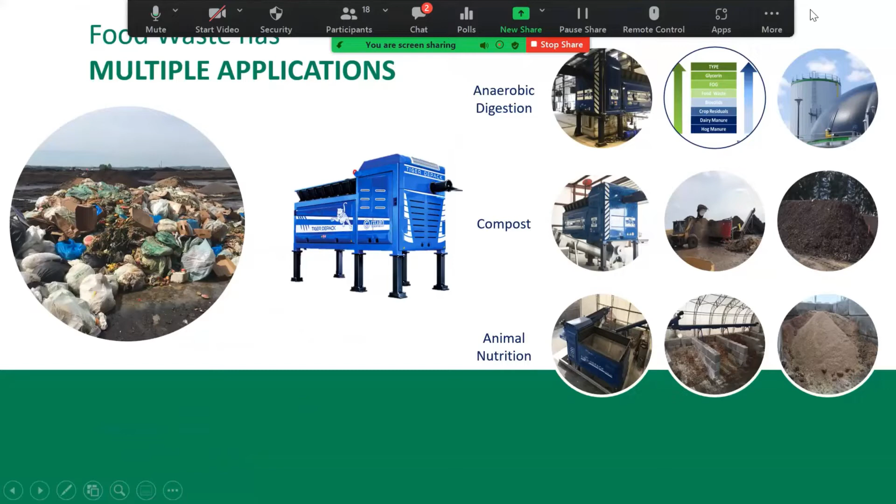In terms of depackaging, I can speak best on our equipment, our Tiger Depack and our Doppstadt BioPress. Here are some of our locations spread throughout the US and Canada. Ecoverse covers North America, and I manage all the sites throughout.

We are growing in terms of our equipment. The Tiger Depack itself has been around for about 10 or 12 years, and the Doppstadt BioPress about 5 or 6. So those are the ones I can best address and answer.

But you see it does generally focus in different regions. Now that regulations are in place more so in California and New England, there are more equipment needs out there, and therefore more recycling and repurposing of organics.

In short, the quickest way to describe depackaging and how it works within the industry: food waste, expired foods, grocery store waste, SSO, or manufactured brand destruction material is simply put into equipment. Here's a picture of our Tiger Depack.

From there, the machine or mechanical device will separate the organics from the inorganics - the packaging, plastic, aluminum, steel - from the organics themselves. The recyclable material goes one way to be repurposed, and the organics are separated and move on to repurposed use. In this case, it'll be compost.

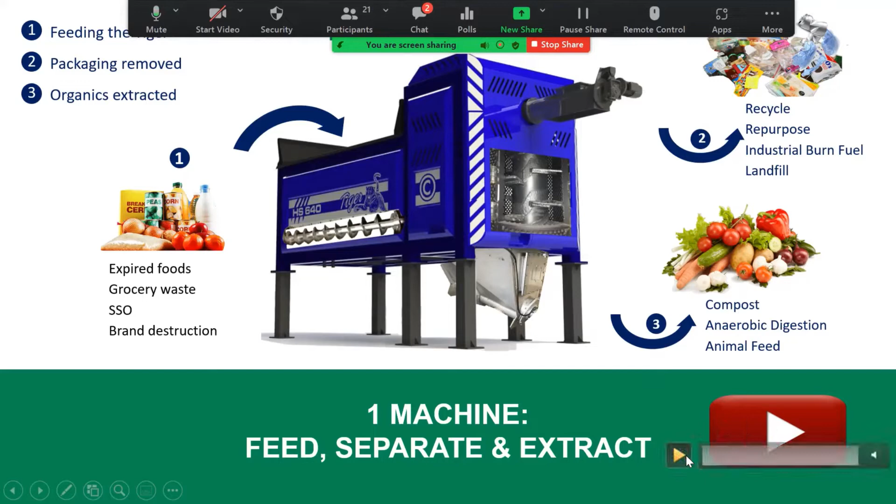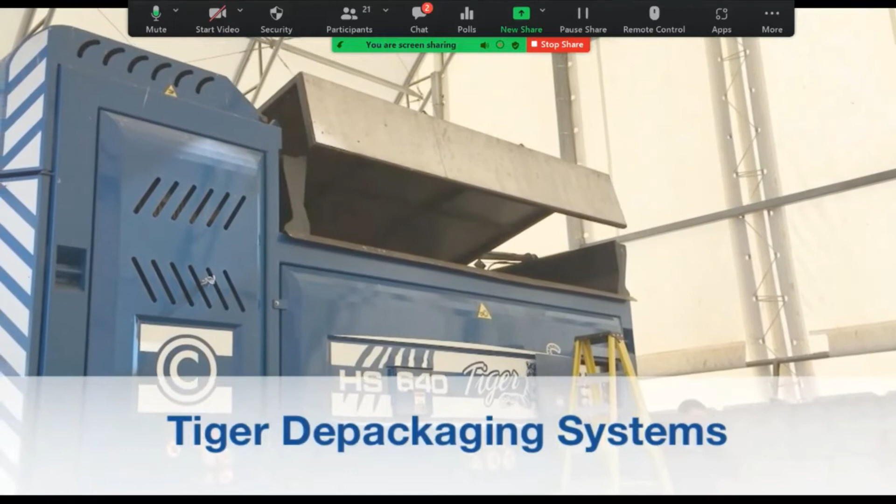So here first, this is a facility in Staten Island, New York. They have a cover over the hopper there to help keep any wildlife that might be in the area out of the equipment. You can see material comes in, soup cans in Gaylords.

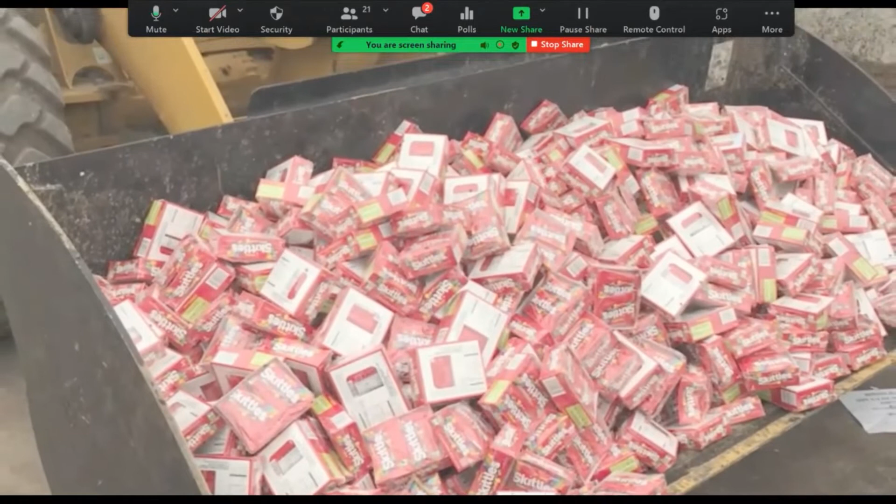This is grocery store food waste, frozen foods, 5-gallon tubs of ice cream and syrups straight off a truck. You have small packaging like the Halloween or fun size Skittles here. So really in terms of depackaging, you're managing most any type of organic packaging that can be repurposed and reused.

Ice cream is a big market for Depack customers and facilities, as is bakery goods from grocery stores, and we'll go into that more in a minute here.

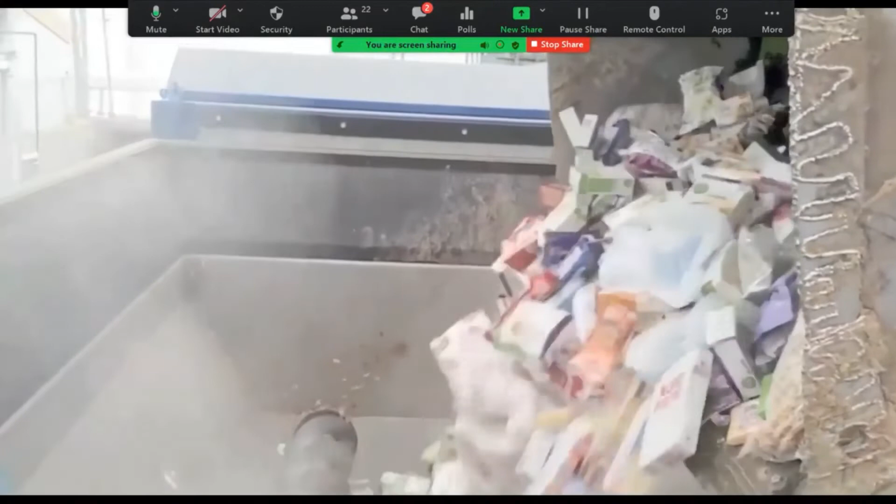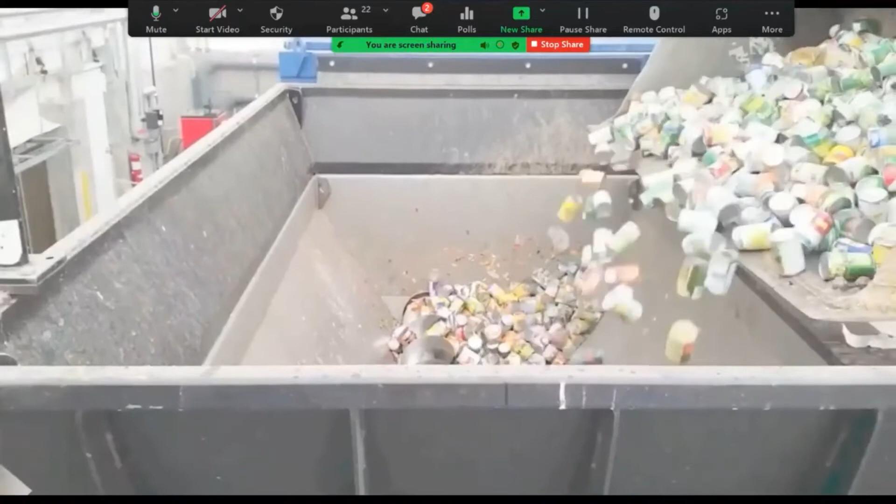So simply put, the material goes into the equipment, whether it be from SSO grocery bags, residential pickup, all the way to manufactured cans. It's lacerated and opened in the hopper.

From that point, it's creating the separation, and it goes through a vertical mill, which you'll see here in a minute, where the actual separation takes place. I'll go into this in greater detail in just a minute. So here's the mill where the actual separation takes place in the screening process.

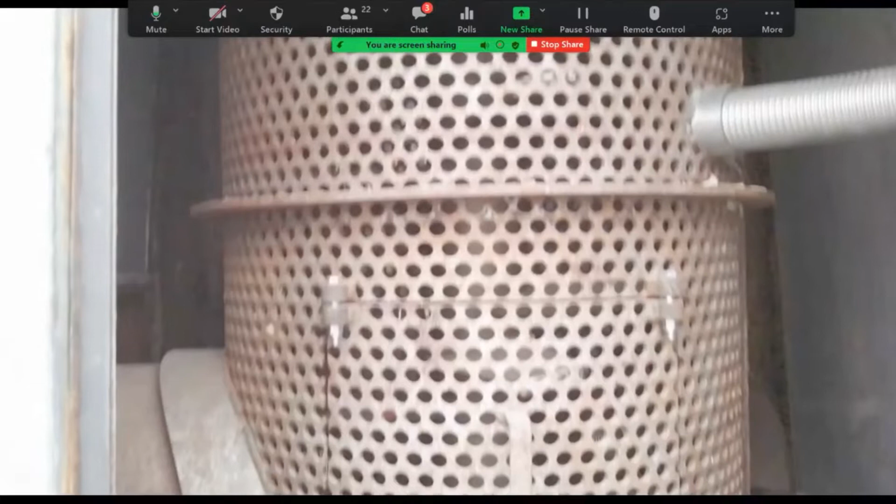And from there, you see the packaging coming out, free of food waste, so that you're able to capture all the organics. You have very little to no food remaining on the packaging. This way you're able to capture near 100% of the organics going towards compost, renewable energy at a digester, or animal feed. And then you'll see the organics themselves in just a minute.

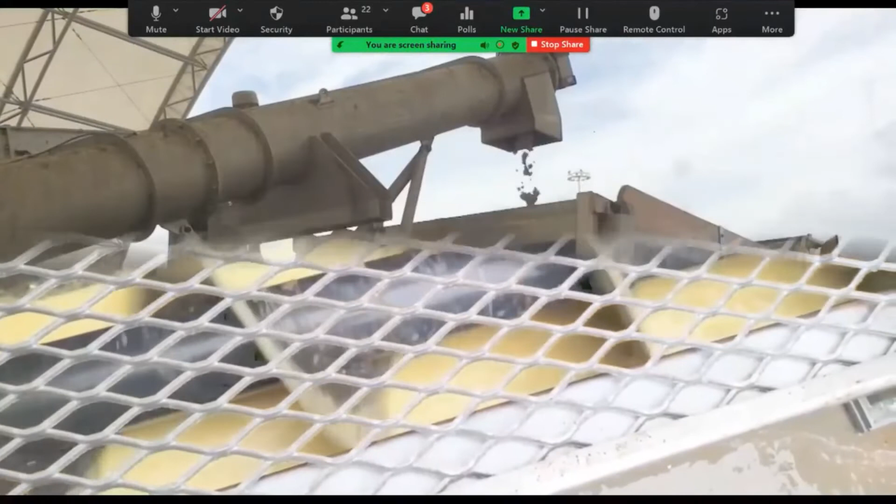And here you see the organics coming out. It can come out as either a liquid, a solid, or a mixture of both - whether it be slurried, a dry powder, or the mixture of both here.

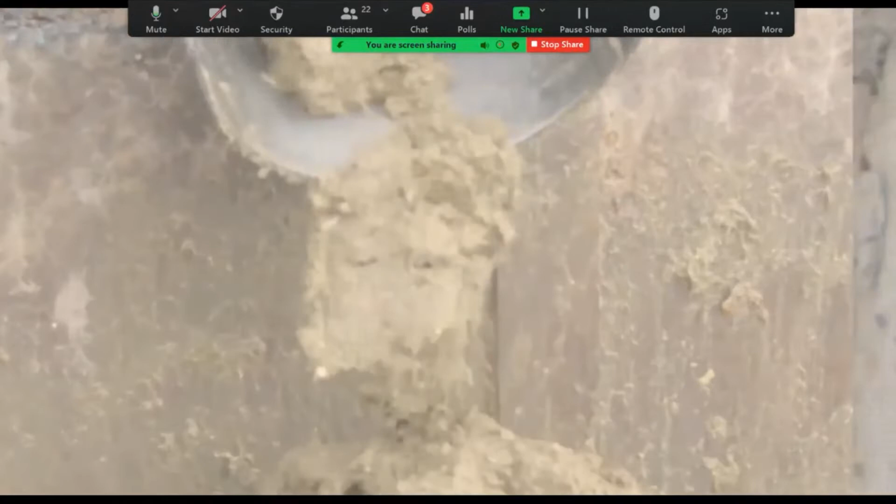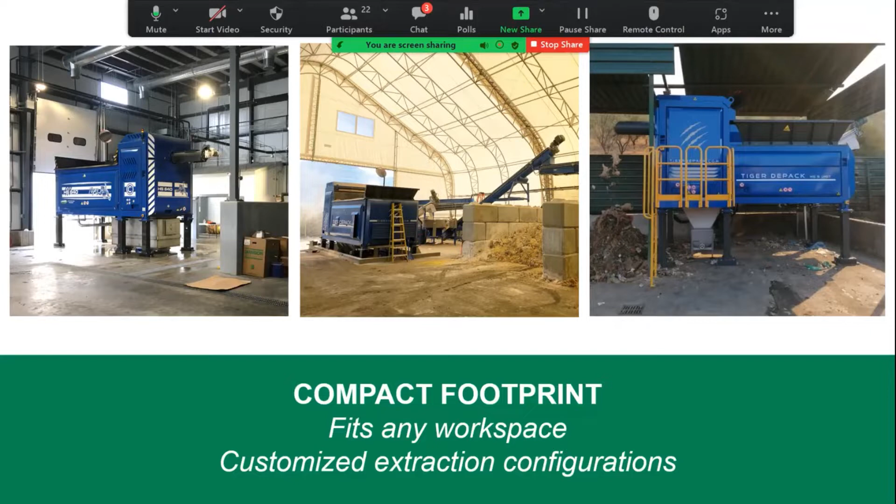So today, to focus on the bin to compost process. You have the waste streams coming in in any type of form, whether it be a sloppy offload, such as a garbage truck with mixed SSO material.

You have bin and recycling facilities where many of our customers have bin recycling programs in place with Costco and Walmart and facilities such as that, where they bring in truckloads of full bins, dump the waste stream into our equipment, clean the containers, put them back on an empty truck, and send them back. So there's a constant rotation of material being sorted, separated, and then repurposed.

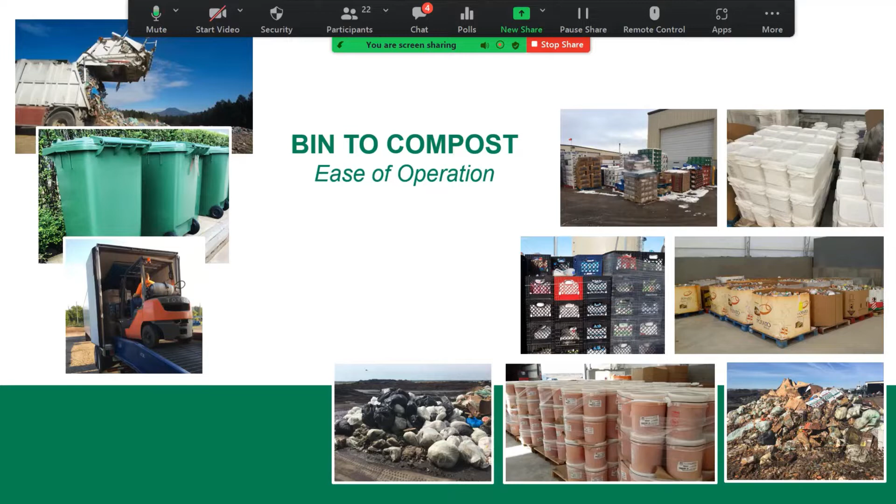And Corey, we do have a couple of questions I thought I'd interject. One is, are there settings on the depackager to select default types of packaging, say a metal can setting or an ice cream tub setting, or maybe not with those labels, but something where you can actually tune to what you're putting into it?

Sure. So some types of equipment do have different components that you have to add and change. I know, for example, the Scott's Depack, which you might be familiar with in your region, has different paddles and settings. So you might have to shut down for a couple hours out of a day to change from aluminum cans to PET plastic bottles.

With ours, with the Tiger equipment, it's all the same material. So you're never changing any components, screens, paddles, or anything. You can dump pallets of aluminum cans followed by steel, followed by mixed plastics, and not have to change any settings.

The one setting that I would say is changed commonly is if a facility wants a certain total solids percent of moisture content in their material, and I can best speak of a Tiger Depack. So if they're adding dry dog food into their Tiger Depack and they want it to come out as a slurry, you can add water or change the setting to have a slurried material come out. If you're good with just having that material come out as is, then there's no settings you have to change. But that would be the settings, add water or turn off the water depending on the organics going in.

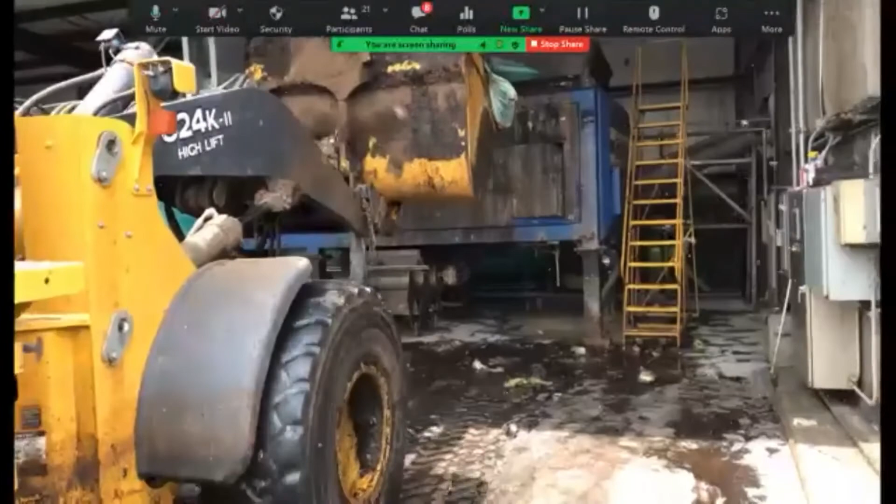So I'll just hit play on the video here real quick. So there's their SSO material that was pulled out of the bins, and they can just put everything in the Tiger. As you asked if different components need to be changed, this is a mixture of every type of material going into the hopper there.

I apologize for the not so steady hand in my film work.

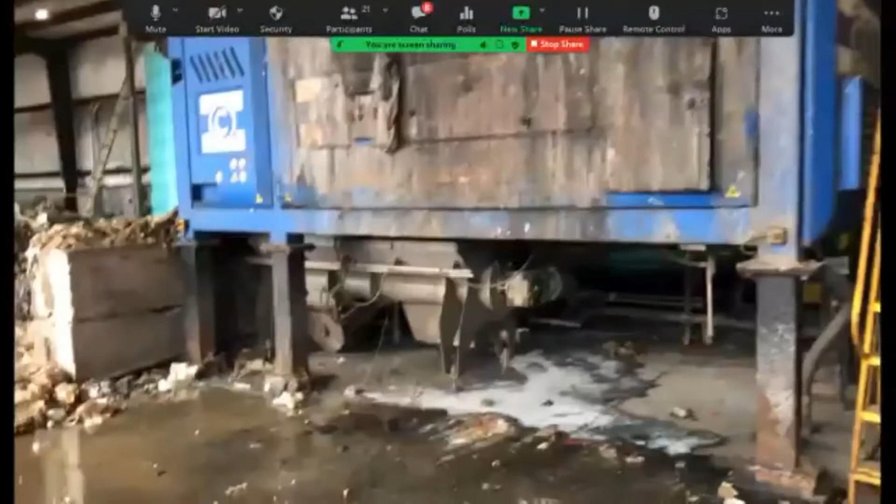So the material goes in, it's being separated, and I'll cover that in just a minute. Here you can see the packaging comes out light and airy. It goes through basically a spin cycle in there, almost like a salad spinner, where it's cleaning and drying the packaging. Over on the left there, that was their SCADA system.

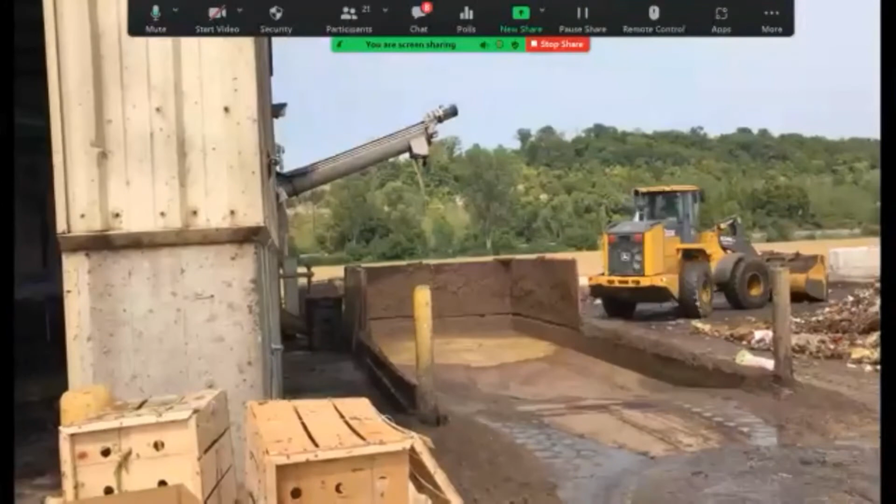There's the mixing bin, they run a 7-minute mix. So the material, green waste, being put into the mixing bin. There's the organics when they run dry organics that they scoop in. Right now the organics are being pumped underground through that white PVC pipe on the right, being mixed for 7 minutes, and it comes out as pre-mixed compost.

So then they just take that compost and drive it out to their rows, which are just beyond that, and they have pre-mixed, straight from a bin compost. So kind of a soup to nuts, one step takes them 7 minutes to process material from the bin, mixed into the compost row, pre-mixed.

They're able to control the moisture content through the Tiger. The easiest way to phrase why they do that is on those 104-degree days, if they turn on their sprinkler system or watering system out in the yard, they do lose quite a bit to evaporation. So by being able to pre-mix it in the Tiger, they're able to control the moisture content, a direct mix, and out to the rows immediately.

Are there screens in there that are also helping with some of the separation, or how does that piece work? Yes, there are, and you'll see that in just a minute. There are screens. Great, thanks.

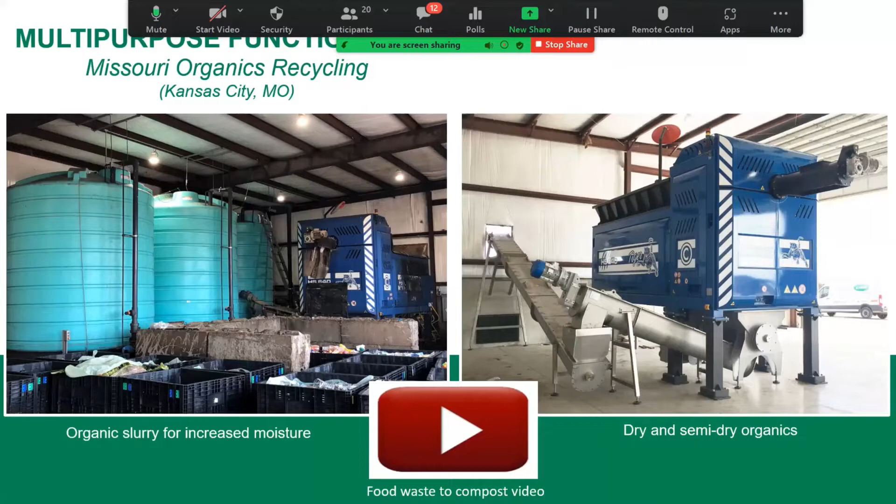You have recycled pond water. Some of the digesters have used digestate to flow back through there. And the last resource is always utility water, where they're having to pay for utility water. So you have the ability to connect that piping to any type of access of liquids you might have.

And then also, as I mentioned before, if you're processing and you put pallets of milk in, or Pepsi or water or anything along those lines, you can use that as your operational wash as well. So two more questions before we move from this slide. One, John just said capturing rainwater on site could also be cool, like in a cistern. The facility in Seattle does that, yes.

Okay, great. And then on this slide, there was a question whether the contamination rate of packaged materials increases or not when it's mixed with the SSO. So here in the table, you're showing different batches of SSO, but then also like canned chickpeas or frozen veggies. So do you have any sense of the contamination rates when it's all jumbled up?

Those, the SSO material would have the chickpeas, the frozen veggies. SSO is just a complete mixture of all material.

Okay, so just a point of clarification for our participants. So SSO, when we talk about it in Vermont in terms of source separated organics, we're really thinking of that as organics that have been taken out of packaging, right? It's already being separated from the packaging. So here you're talking about both unpackaged and packaged combined together, is that correct? Correct. Yeah. Okay, yeah, I guess so.

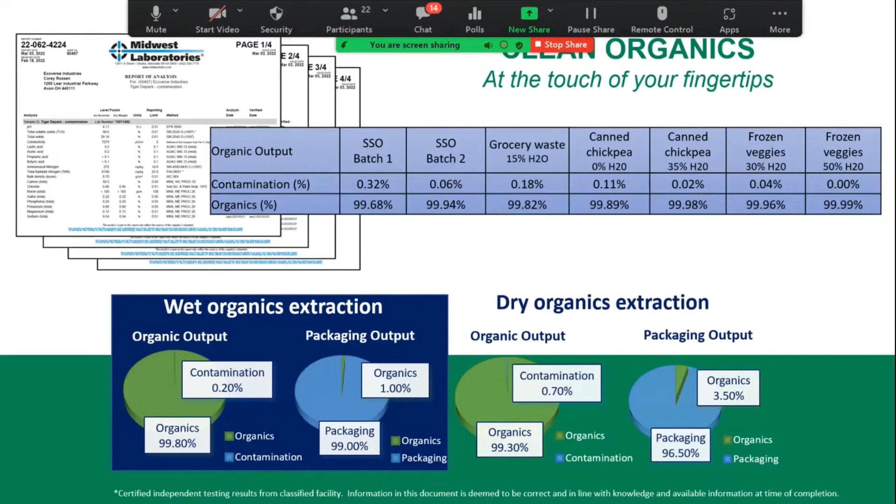But yeah, okay, so I know there's a few other questions, but I think you're going to be covering some of them, so please go ahead and I'll keep filtering through the chat. Sure, perfect, okay, so moving on.

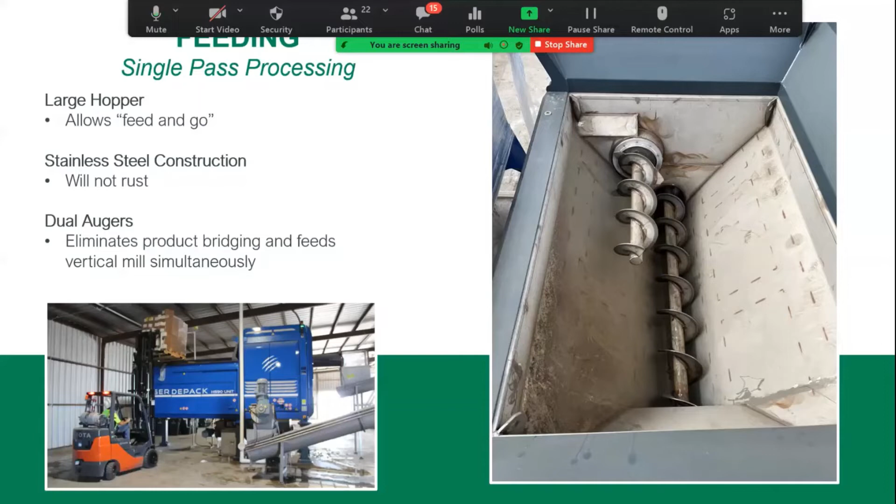So a standard screen with a tiger is about 3/4 inch. We have a lot of facilities that have 3/4 inch on the bottom half there and 1/2 inch on the top.

And it's actually a pretty smart concept in the sense that 3/4 inch on the bottom is the default size, that's through the past 15 years of Tiger being through R&D, been discovered that is the most optimal size screen for throughput, to get anywhere up to 40 tons an hour of material through, as well as the lowest percent of contamination rate, down to less than 0.5% of contamination in the organics.

So the facilities that have the 1/2 inch on the top, by the time the material spins, gets up to the top like a salad spinner, it's just clean, dry packaging. So by shrinking the screen size down, you have less chance of potential contamination. You're not changing any components material to material, the machine does all the work, and the screening is in place at its optimal size and dimensions to manage that material for clean organics and clean packaging as well.

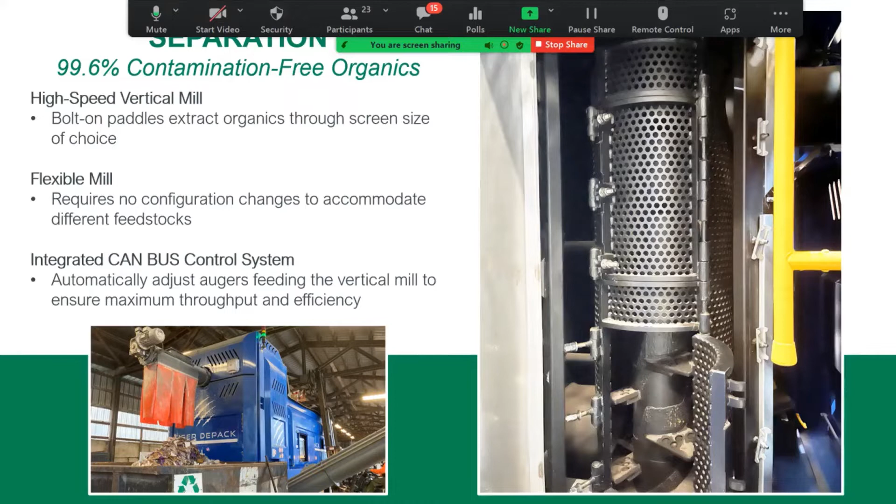If they're pumping material, I don't know if you can see that, but the pipework actually runs along the wall and ceiling out to, they have 3 organic or liquid storage tanks outside of the warehouse there that they manage it that way.

So it's very simple, and the operator would just press a button to have it pump material or have it auger material and not have to change any of the components. The machine itself will turn on and off the proper motors. If you're pumping, the augers are off, the pump's on, and back and forth.

And there is an auger inside the organic tank there to keep the material flowing and smooth. It flows in different directions, in reverse I guess is the best way to phrase it, to keep that material over top of the auger when you're running the auger system, and pushes it forward and keeps the material continuously flowing to the pump chamber there. So very simple.

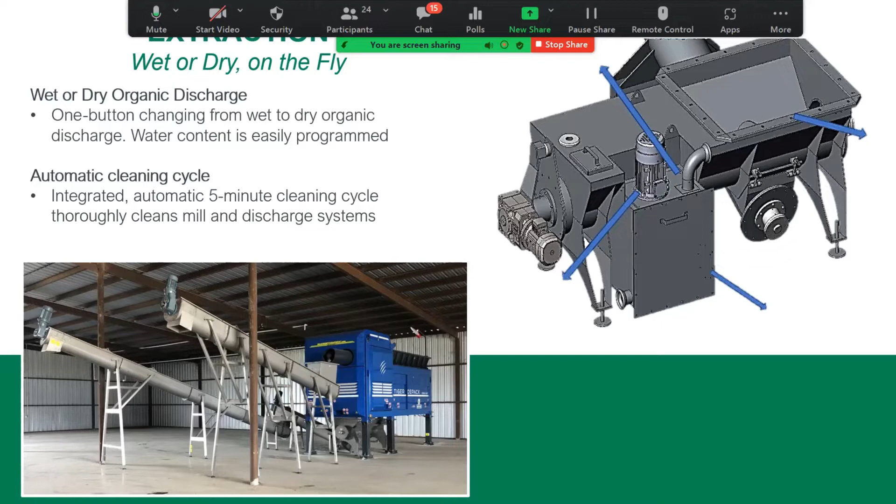So they can centralize. Some of the digester facilities and larger facilities have that as a way to control all of their screens, and they see everything all at once. The only thing you cannot do remotely, for safety, is power on and power off, because obviously you don't want somebody working on the machine while somebody in a separate building turns it on.

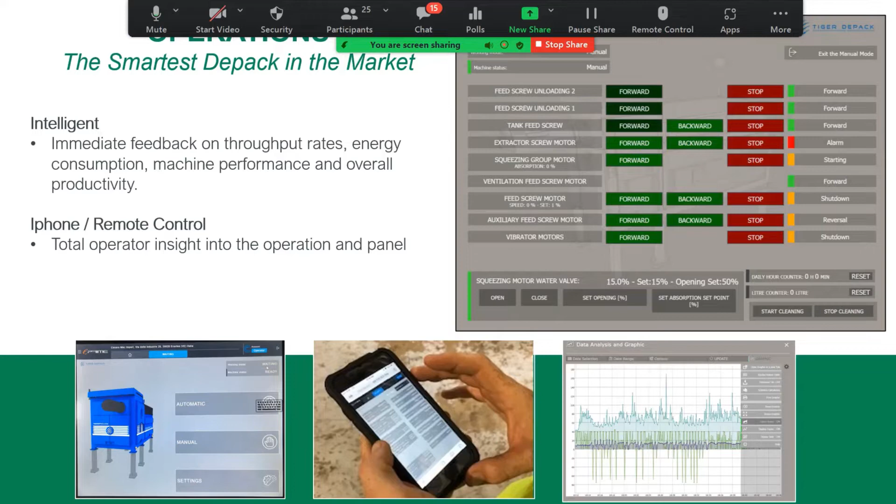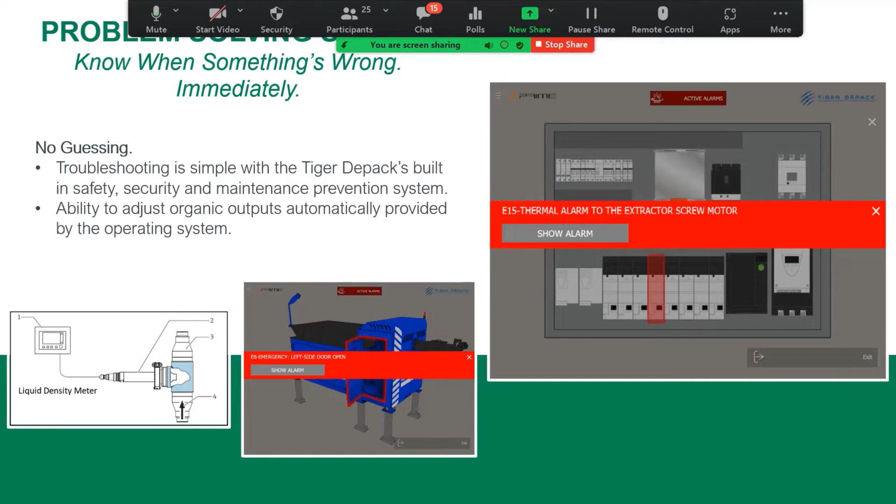Just another video here real quick to show. So that video before was showing the wet processing of material in Missouri. This is a video here showing drier material. So this is photos of an animal feed facility, but it was my best pictures of what dry material looks like being processed, so you kind of have an idea of what cereal and say dog food look like going through, as opposed to mixed organics and such. So let's play this real quick.

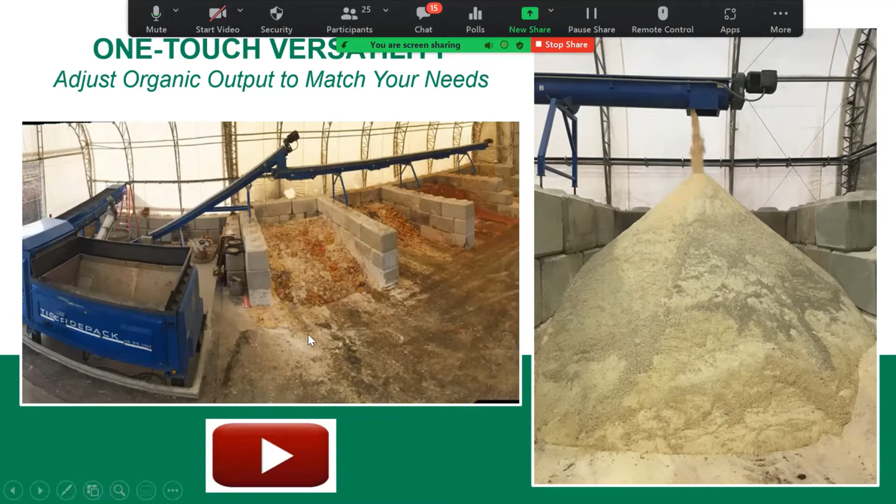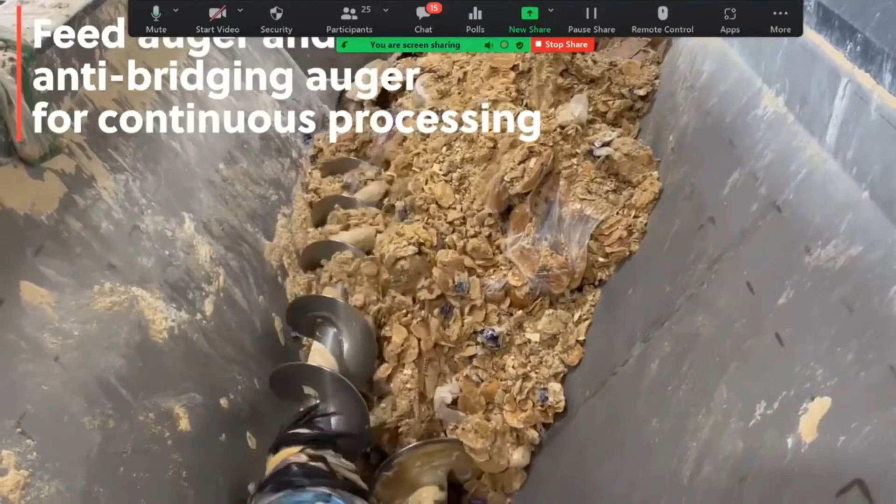So this is from an animal feed facility, and this is also a regional Tiger for you. This is in North Grafton, Massachusetts. So this is our first Tiger up in the region north of Staten Island, so our first New England one. We have another facility taking on a Tiger next week in Berlin, Connecticut. So we do have some regional ones up there for you guys to see, so you can see some alternative equipment.

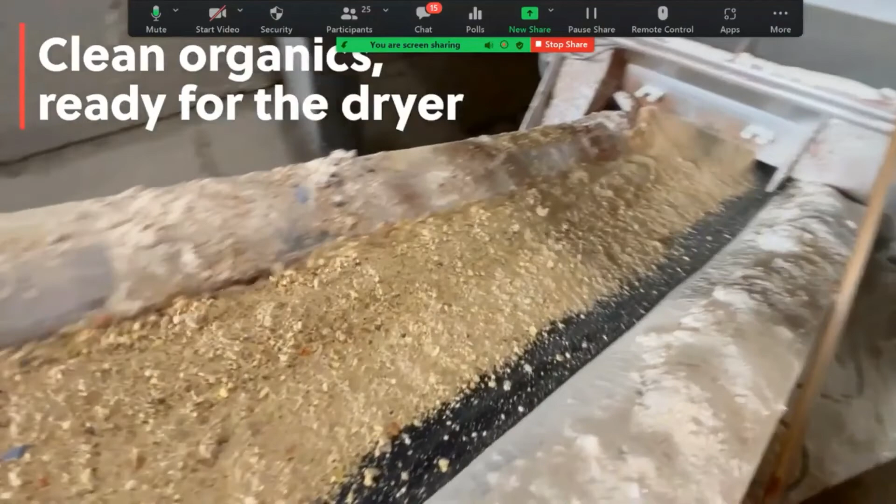Here you just see the feed screw on the bottom pushing it in, the auxiliary pushing it back. There's your clean, dry packaging coming out. And then being animal feed, so it's coming out as a dry powder, which is their preferred material, so they're not adding any water. So this is the separated organics, and then from here they put it in their dryer, and that is what the complete dry product looks like for animal feed. And again, this is your North Grafton, Massachusetts facility.

Any questions? Yeah, so is now a good time to circle back to some of the other contaminant questions? Sure, absolutely. Okay, great. You want me to go back screens or stay here? I think you can stay there for now, and we'll see.

Let's see. In terms of data on particle sizes of packaging remaining in the organics after depackaging, I know we talked about percentages, and you talked a little bit about the size of screens, but I don't know if that's an indicator also of the size of packaging that might be in the organic portion.

The size of the particles, we could run through a different set of systems. One of the main tests that we're most often asked for, or preferred by a lot of the customers, is the TMECC 0306 and 0308. With that testing, it's not giving us a breakdown of actual particle size, though we could request that. It's just a matter of where they're pulling out of each sieve in order to give us the results. But we're going for the overall amount as opposed to the sizes. With the 3/4 inch, it's really a 19 millimeter 3/4 inch screen. The contamination you would have would be obviously smaller than that. Anything larger than that would be screened out. But generally, when you see a piece of contamination, it is your fingernail size or smaller.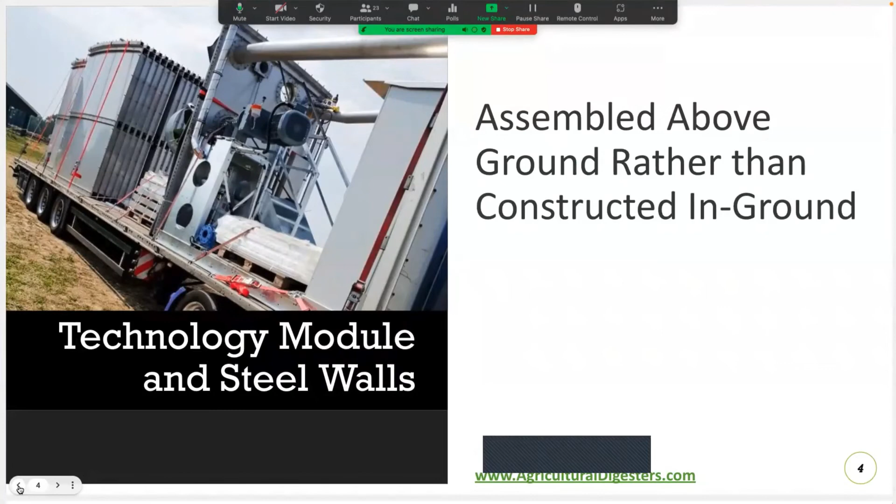Natasha, are you showing some of the images of the digester being transported in pieces? We were just on the slide showing it on the transporter. Yeah, and then the next slide is the video. Good, let me know when you're ready for the video. After you've got up there for a few seconds, there's a 1-minute time-lapse video of this model digester actually being assembled, so those familiar with digesters will realize this is a very different situation. If you could run that video, it takes about 1 minute. Sure, here we go.

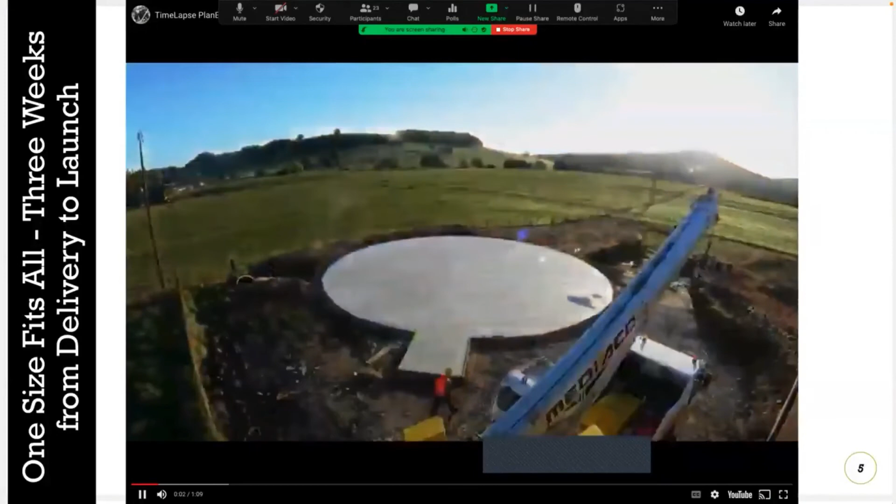There's no volume on this one, so don't worry, folks, if you can't hear anything.

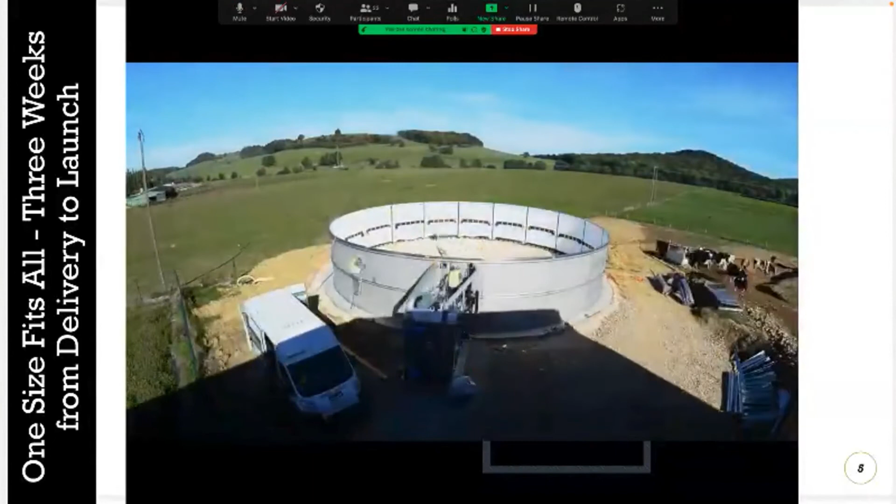Be nice to be able to build it this fast.

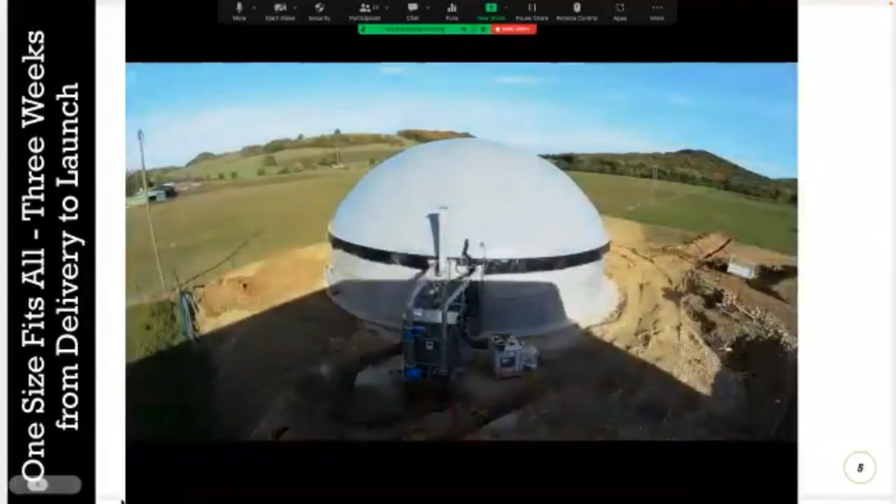All right, okay, we got it? Yep. Good, thanks. Okay.

What this all amounts to is that today, on a Vermont farm of 300 or more adult cows, the return on investment from a digester is pretty good. And that's somewhat different than the other 49 states. It can be done there, but it's not as financially beneficial as in Vermont.

My company represents this system in Vermont. As a matter of fact, I've told Brent and Natasha earlier, I'm from Connecticut, but I saw the opportunity here between the cost of the digester and the price that Vermont pays. I drove back and forth to Vermont from Connecticut for a couple of years before, about a year and a half ago, I got a place in Williston. I thought people would like the fact that I was now living in Vermont, but they tell me Williston is not really Vermont. I guess it's too many modern buildings and Walmarts and that kind of thing. But I like it, and it works great for me.

Unfortunately, there are a couple of snags when I got here. Often an anaerobic digester is built using funds from not only the REAP USDA program, but also the EQIP, offered by NRCS. That's the case in Pennsylvania and other states. However, when I got here, I was told that Vermont does not prioritize greenhouse gas reduction, or does not score it higher than water quality, especially in the Lake Champlain watershed. So the farms I'm talking to might likely not get EQIP funds.

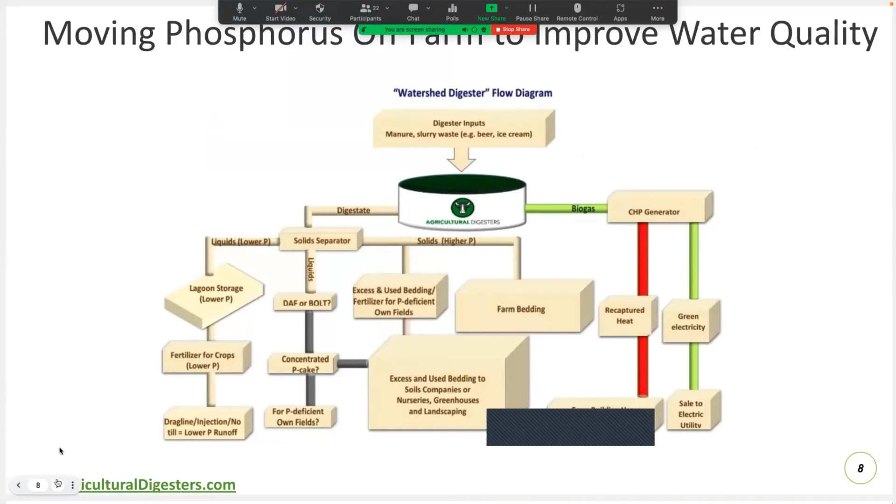Essentially what this is doing: first the manure with phosphorus is digested, and then it is separated into liquid and solid fractions, and both contain a certain amount of phosphorus. We'll use the separated solids for bedding, but the system often makes twice as much as needed, and we're hoping to transport that portion off the farm.

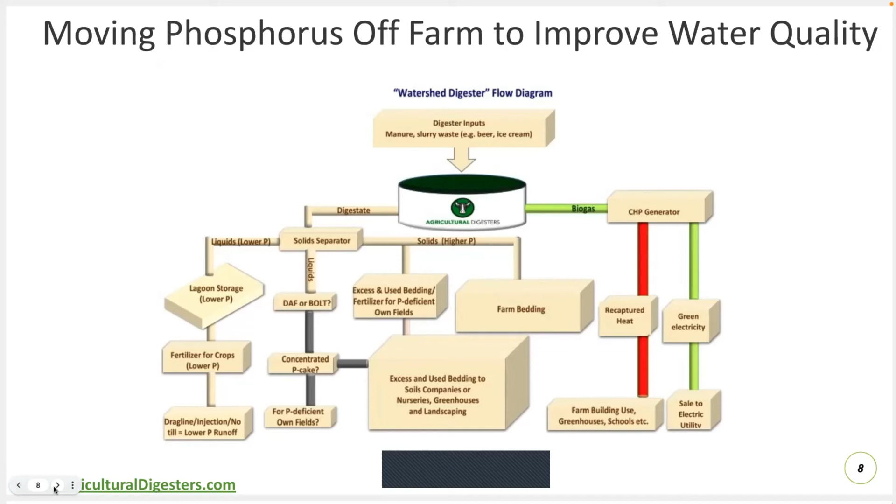Before I leave it, there's also another exciting new opportunity, the Climate Smart Commodities Act, which did just come out. It will hopefully, to some degree, supplement the money that the farms hope to get from the EQIP. We're putting that together now and should have an answer in July. I'm not sure where we are, but I'm hoping to come up soon to a slide of someone's hand holding some of the digested solids.

You got that? Okay. Yep. Okay, good.

So using these separated solids, which to me look, smell, and feel like dirt, will create an opportunity, we feel, for Vermont compost companies to create revenue using excess or used digested solids from farm digesters. And the sales should, in return, result in more anaerobic digesters, which capture and reduce greenhouse gases by converting them into renewable energy, heat, and these digested solids.

My company, Agricultural Digesters, using a planning grant from USDA called the Value Added Producer Grant, or VAPG, will meet with companies over the next few months about utilizing used or excess digested solids in compost. We would also be open to meeting with greenhouses and nurseries about using these solids as a soil amendment.

Wanting to obtain a fair and consistent price for farmers and investors, Agricultural Digesters will also apply for a working grant from VAPG, Value Added Producer, later in 2022, to reduce the cost of transportation, which, as you've told me, is the major factor in composting profitability. We already received the planning grant, but in the working grant, there could be as much as $250,000 available if we're successful, to somewhat offset the transportation costs.

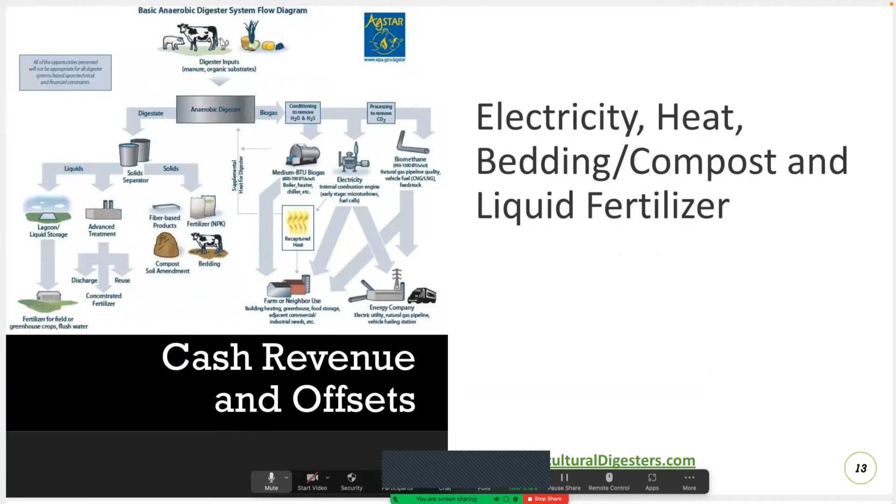Okay, just a quick review of the origin of these digestates. I know several of you know the anaerobic digesting process, but I'll describe it quickly—there's a chart here about that. Essentially, animal manure plus food waste is placed in a sealed tank without oxygen for 17 to 25 days, depending on the type of system, whether it's a plug flow, as DVO has built many of in Vermont, or a complete mix, which is what this digester is. There's no oxygen, and it's heated to 100 degrees. Bacteria forms under these conditions, and methane and carbon dioxide, greenhouse gases, are released.

These released gases then power a combined heat and power generator, while any excess biogas is flared off, so that's destroyed as well, which is a good thing. The electricity created is sold to the grid, or in some cases used off-grid at the farm. The heat from the generator can be used in farm site buildings. While the digestate looks like manure, it loses most of its odor and is largely pathogen-free when it first comes out of the digester. It can then be separated into liquid and solid fractions with a screw press separator.

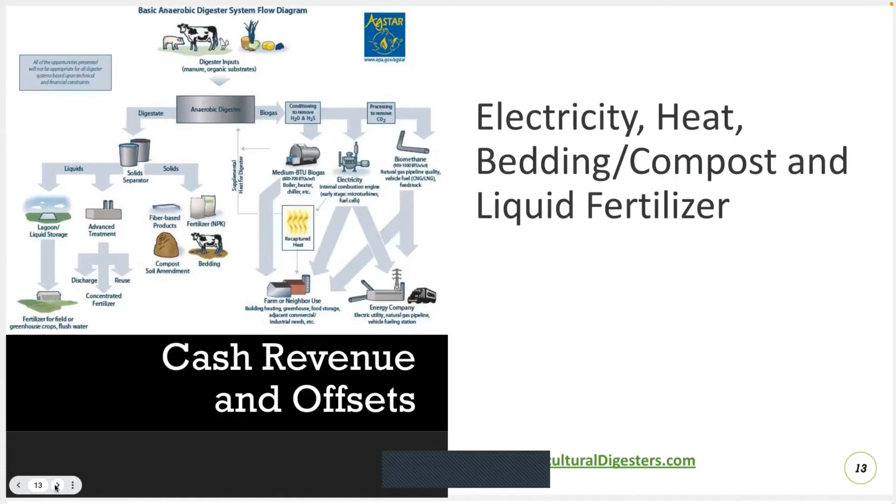These solids look, feel, and smell like soil, and are useful material for compost. One question that might be asked is whether solid digestate from 100% or 75% manure digesters makes as good or better compost than raw manure and other materials, and what the benefits are to the compost company. The material contributes two of the three main ingredients of compost: moisture and carbon, the fiber material, with the composter providing food, nitrogen.

For more detail, I have a report titled Digester Manure Analysis Study, from Penn State and a company I work with called Team Ag down in Lancaster, PA. Lancaster, in my mind, has the most effective and largest digester cluster in the USA—they actually have a farming community built around exchanging information on their digesters. The new digesters in Vermont are all primarily manure with some food waste, just like the Pennsylvania farms I'm familiar with. This report has a breakdown of exactly what's in it. I just put a bit from the top on the slides, but I have the full report, and I think Brent has looked through this. Brent, did anything strike you when you looked at that report, or was it kind of what you expected?

No, it certainly was what we had expected. We have in the past used manure as part of the materials for compost. This is sort of a step down from that—it's not nearly the potency of straight manure, but it provides that fiber we're really looking for. We typically use woody material in building compost. I'm hoping we'd like to do some trials with these solids to see if the breakdown is faster and more thorough than we're finding with wood chips.

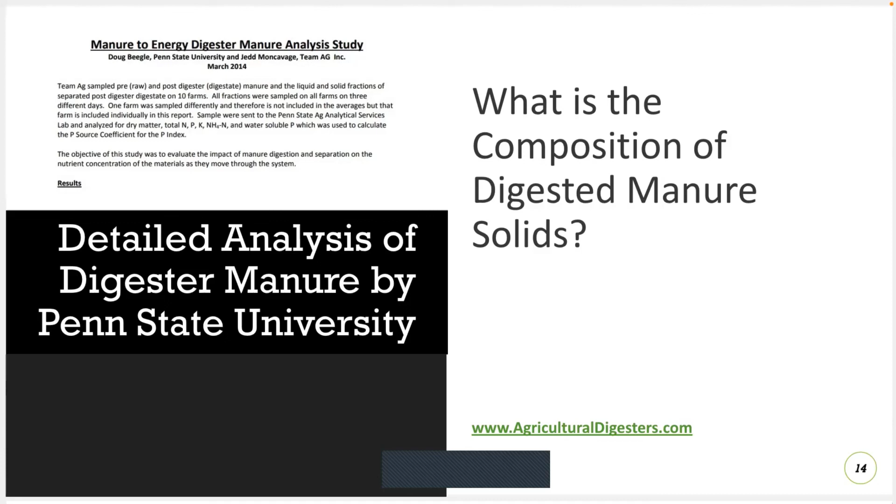As I think it's already been mentioned, there's also the possibility of partially composting on the farm, and we want to look into that. That would include concrete flooring or some way to ensure that the phosphorus was not leaking at the farm. As mentioned, it's a big thing about the possibility of getting EQIP funding in the future, that we show we are shipping at least some phosphorus off the farm.

We realize the cost of collecting and transporting solids off the farm to the compost company or customers is very important. We feel this might be done by the compost company at a reduced price for the material, and then later at a higher price by the compost company when there's hopefully some reduction of fuel costs through the VAPG grant.

Solids could also be transported by the farmer or an independent trucker. I know some farms with digesters truck their excess bedding solids to another farm, and the other farm pays them probably somewhere in the area of $10 a yard or perhaps more. Something that isn't immediately apparent but still important, I think, is the potential marketing and public relations benefit to compost companies for utilizing Vermont digested solids.